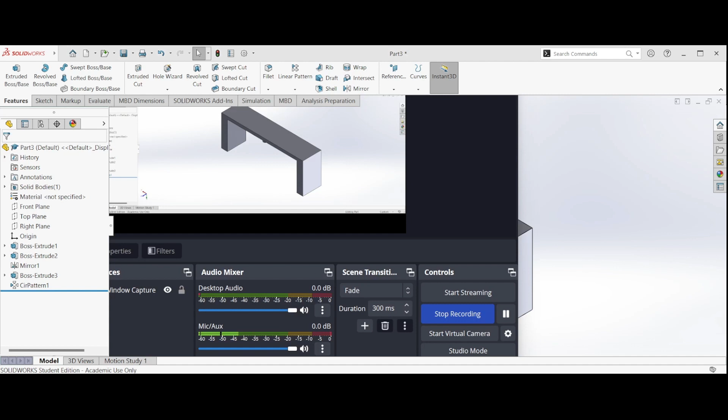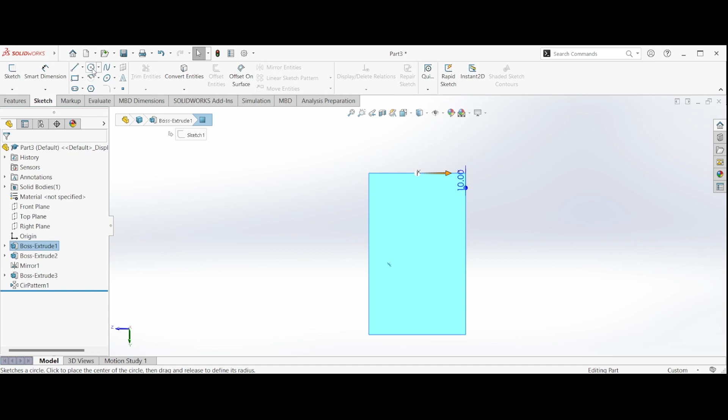So where we're going to be making our extruded cuts is going to be on the sides of the C bracket. This is a useful strategy if, say, you wanted to put an axle through a C bracket, which is kind of how we're going to approach our work today. So, like in the previous video, we're going to sketch some circles.

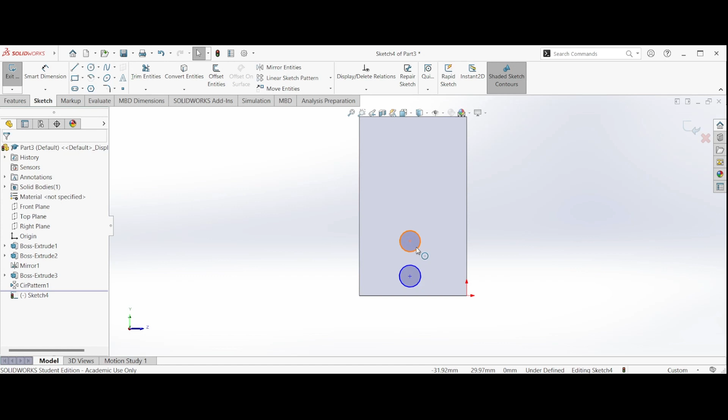Here I sketched two of them. You can sketch them out one by one, or as we're going to do today, you can just sketch one and we can make a linear pattern. Just like in the previous video, when you want to make a pattern, you first have to extrude or extruded cut the feature. In our case, we're going to do the extruded cut.

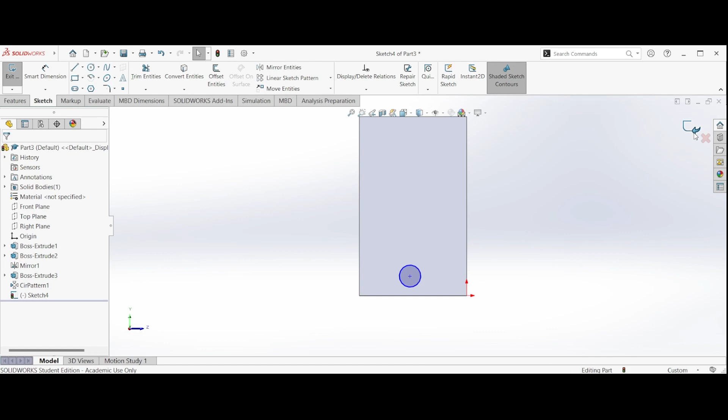To do an extruded cut, you're going to use the extruded cut feature right here. And it's going to make a cut in your part. Over in the menu, you can see our options. One of them is blind, which will make a simple extruded cut where you specify the length. There's also mid-plane, which does both sides of the plane. There's offset, which will offset the extruded cut.

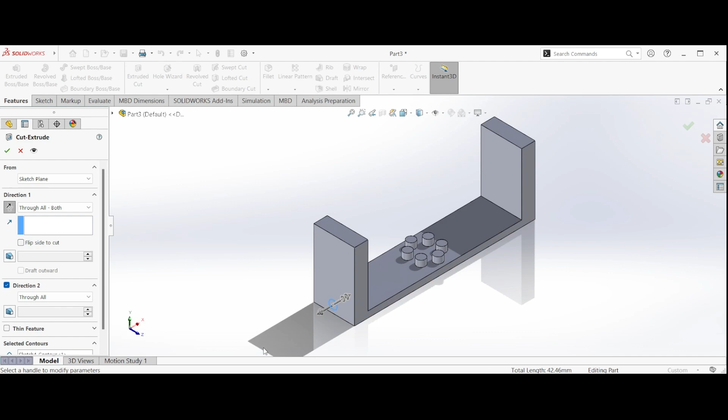And there's these through-alls. The first through-all is only going to go through the initial body, which in this case is this part of the C bracket. But if you go through all both, it's going to allow you to go all the way through on both sides. In our case, we're just going to go through all. And as you can see here, I have dragged out this extrude feature to go through both parts.

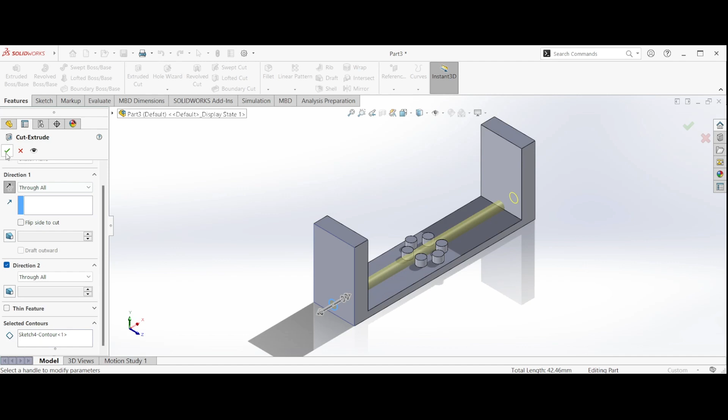Another feature I want to mention is, just like with extrude features, you can specify the direction and you can also do a draft, which is very useful if you're going to make a machined hole from scratch. When you're ready to save, just click the green check and it will save. And as you can see, we have extruded this out and we've also made a nice little groove in our part, which can be useful depending on what you're trying to make.

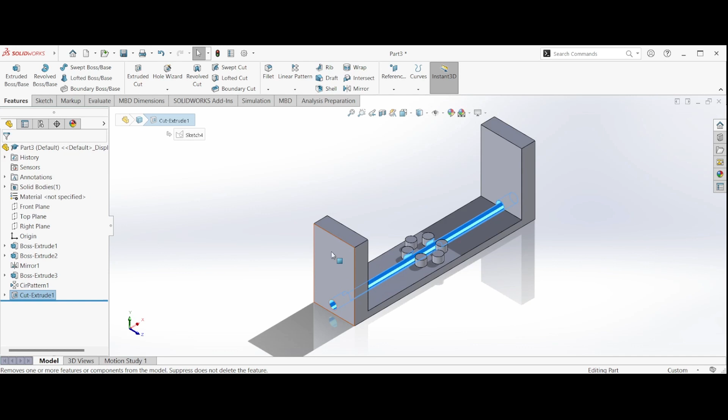Now, as I said before, we are going to use a pattern to make this feature go up the entire length of this end of the C bracket. And to do that, we're going to click our Cut Extrude entity. We're going to click Linear Pattern this time. And to specify the direction, we're going to click this vertical direction. And as you can see, when you initially select it, it's going to want to go down, but we want to go up. So we're going to click this box here, and it's going to reverse the direction.

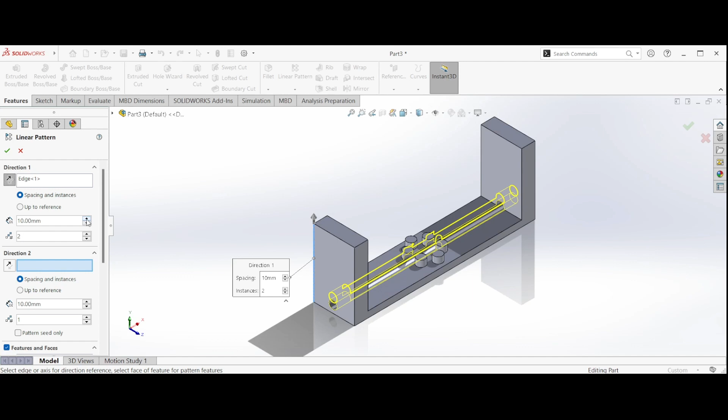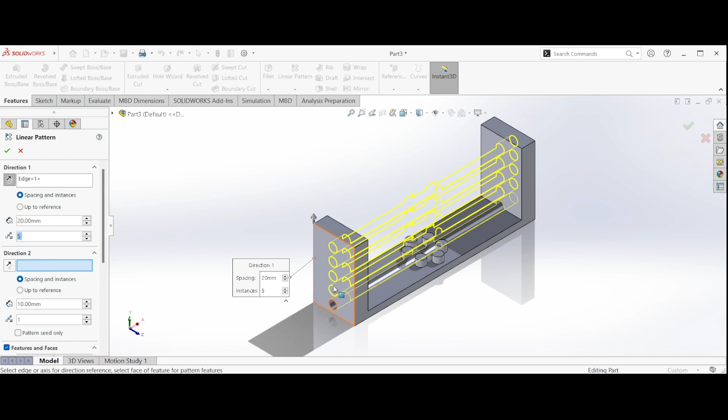I'm going to space them out 20 millimeters apart so they're not right on top of each other. And I'm going to add 5. And as you can see here, it's going to repeat the same extruded cut feature 4 more times, going up the C bracket. And when I save, you can see that we now have 5 holes going up the edge of our C-bracket.

In the next video, I'm going to briefly go over the Hole Wizard tool. This is great if you want to make a predefined hole, such as a screw hole. And then in future videos, we're going to go over some basics of SolidWorks assemblies.